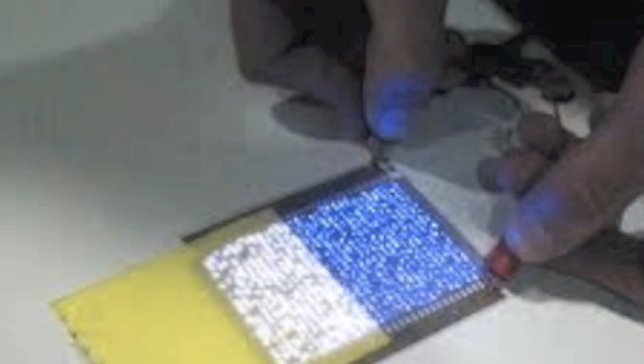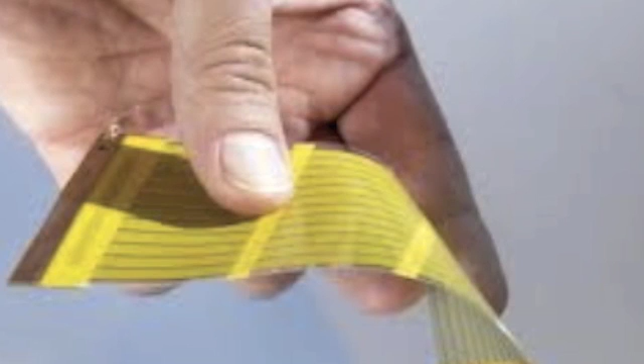A company called Nth Degree Technologies, which is based out of Arizona, is a research and manufacturing company filled with extremely creative and intuitive scientists, engineers, and manufacturing personnel who have made printed semiconductors not just a dream, but a reality. Nth Degree has sparked a new printing revolution by turning the printing press into a 3D manufacturing instrument used to create the world's only fully functional printed semiconductor products.

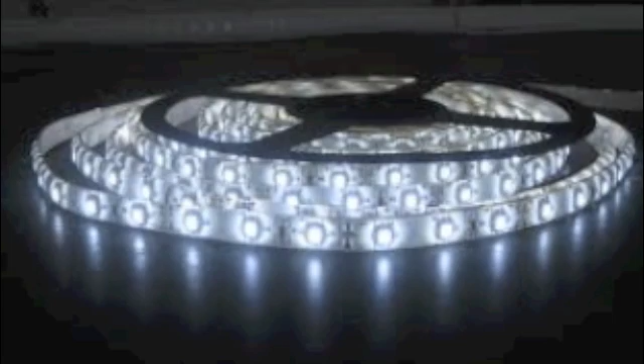The concept of printed semiconductors is the base technology for all their products, which include printed solid-state lighting and printed photovoltaics. The next generation of Nth Degree products are already in development and are extremely revolutionary. For our project, we are designing a package for Nth Degree's new light bulb.

One of the primary goals for a packaging design is to ensure that the product will have great shelf presence and stand out amongst its competitors. If you browse the light bulb section of any local big box hardware store such as Lowe's or Home Depot, you'll notice that the shelves are crowded with hundreds of light bulb choices that could easily overwhelm the average consumer, causing them to simply choose the first bulb that they can find that matches their specifications, regardless of brand.

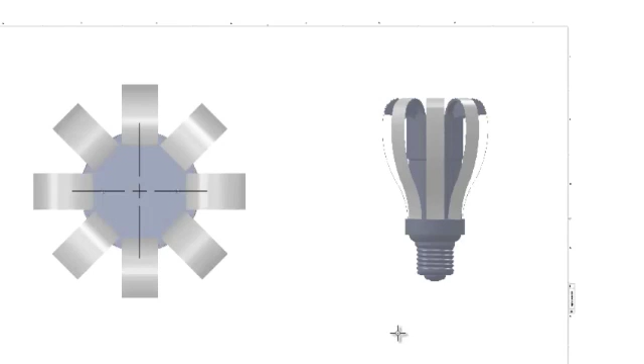Here's both a side and top profile view of Nth Degree's light bulb. You see on the side profile, we could build some type of rectangular base to lock the light bulb into, but this leaves the top exposed. Though it does leave it exposed for the consumer to see, it doesn't provide any sort of structural support. So what we could do is implement some type of paperboard insert that would go between the gaps in these bands of the bulb that would provide support and protect them from being bent or flexed during the shipping process.

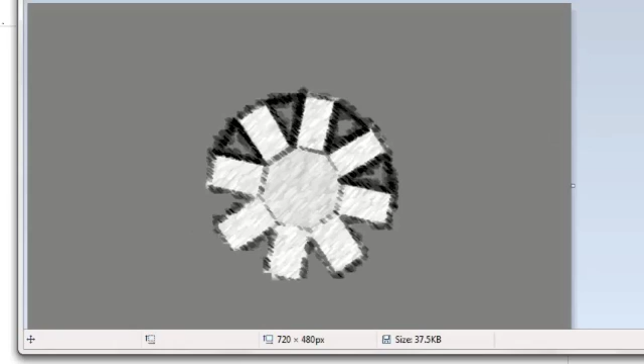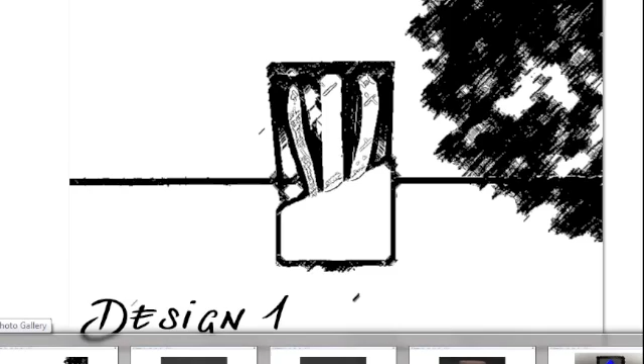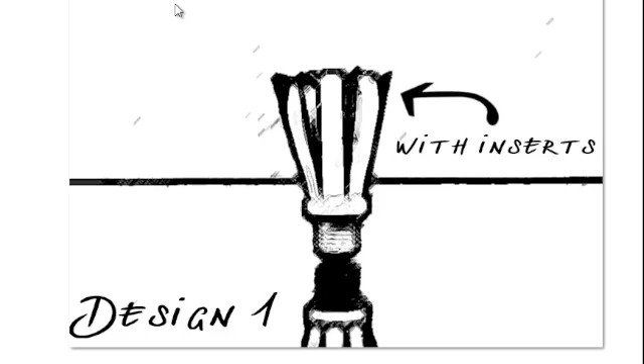Here's our first design. We used a paperboard base to lock the light bulb into place. And then the upper portion could be made of paperboard but have large rectangular windows cut into it, or it might be made of a clear, rigid plastic. But if we use paperboard for the upper with large windows cut into it, it might compromise the strength of the box. So in that case, we could use these paperboard inserts that would go between the bands of the light bulb. They would be triangular shaped with a fold down the center and be placed between the bands to provide additional structural support.

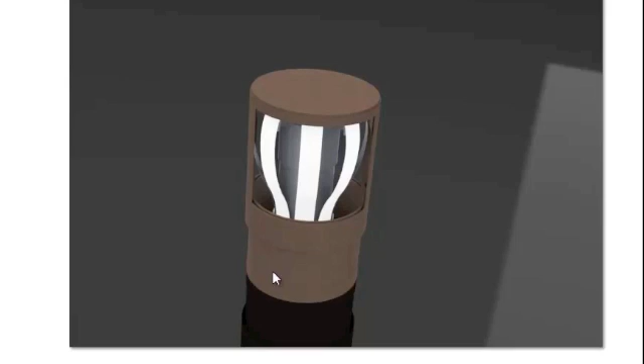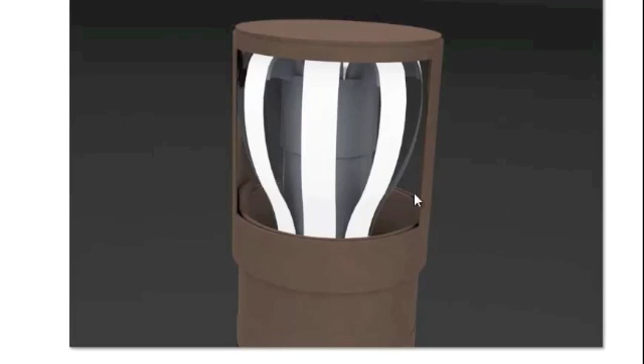Here's our second design based on the top profile of the light bulb. This is just an initial design of what led us to this. This can be constructed from two rectangular pieces of paperboard wrapped around a cylinder about the same diameter of the light bulb and then glued together at the seam. And then the upper one would slide over the lower one, and they could be glued together in the overlap. And this still gives us a large window to view the product. And it's also symmetrical, so that the consumer has a really good view of the product.

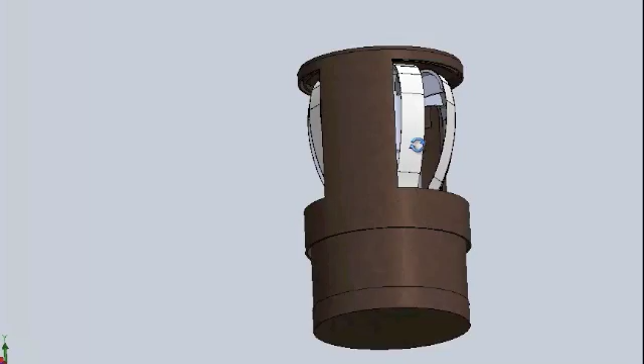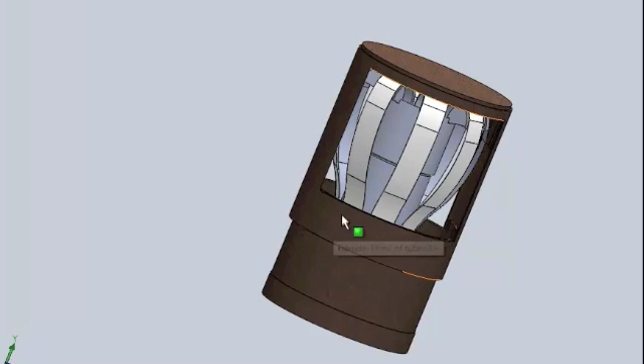We could seal the top and bottom pieces of the tube with two pieces of paperboard cut to fit. And Aaron and I have been talking about designing some type of pull tab system for the top so that the container can be opened. Or possibly designing a twist lock system where you twist each piece in an opposite direction to open the container here at the middle at this overlap seam.